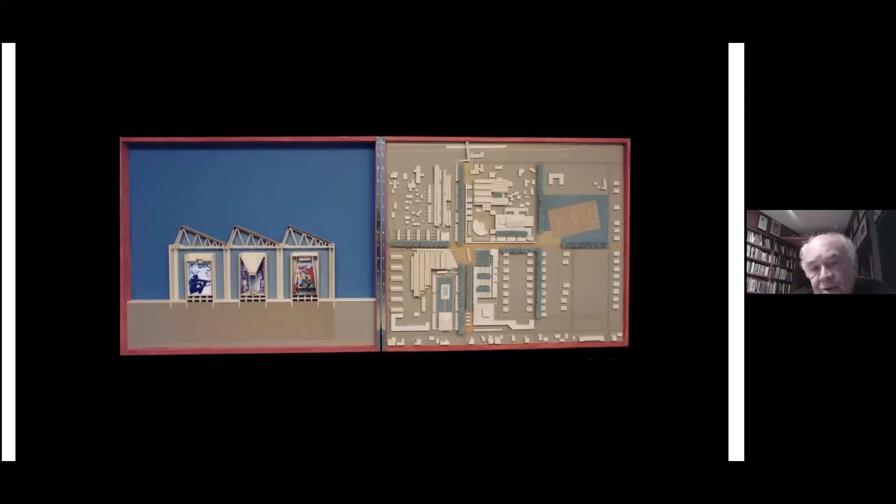So the first project, very quickly. I'm not going to talk about this, it's a competition we won in Port Elizabeth, which is the Detroit of South Africa.

It's where most of the cars made in South Africa are assembled and sold throughout Africa. So it's a heavily unionized and highly industrialized city. We won a competition to design a cultural precinct there, and we were commissioned to design 3-4 buildings.

Of which we completed 3: a museum, an art gallery, and a library. These are some drawings I made for the competition entry, and the sawtooth roof makes its presence felt very strongly in the museum itself. There's a whole story about what goes underneath the roof, which is a series of memory boxes, very tall, 12 meters tall. But for me, what's important is the profile of the roof.

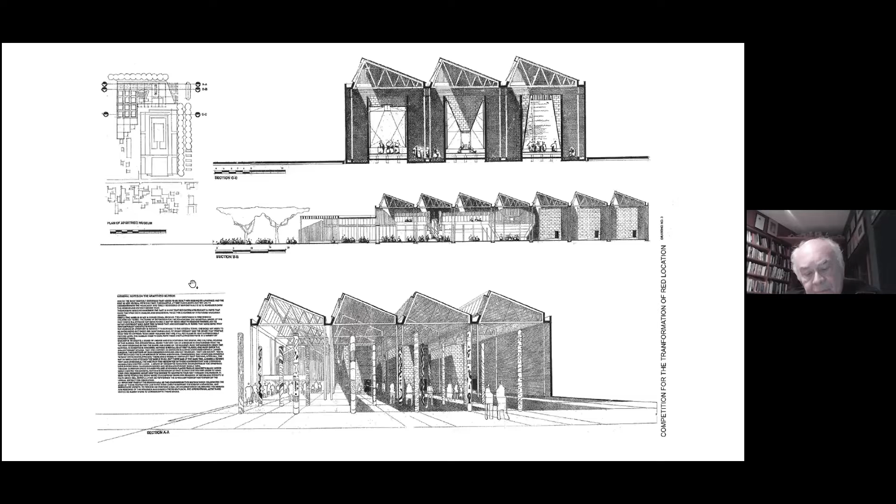The reading of the building became quite important, because we've had some difficulties with the local community, but that doesn't have anything to do with our architecture. It has to do with some of the other political issues that exist in Port Elizabeth, part of the Eastern Cape, which is a disaster area at the present moment. But the building itself, as an architectural work, worked very well. People, I don't know whether it was a familiarity of the form or whatever, but it fitted within what people had expected of a public building.

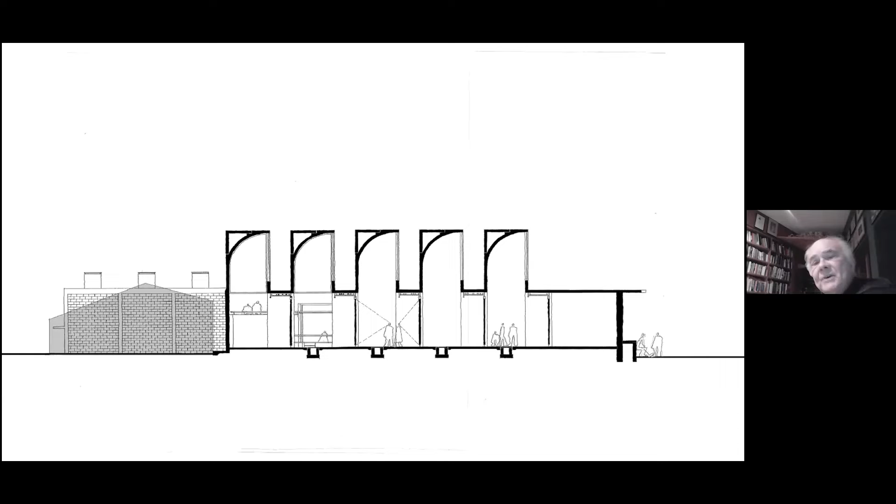So this is the museum building. The second building we did was the art gallery, which again picked up on the idea of a serrated roof, except in this case the roof was adjusted to accommodate the purpose underneath, which really was to do with the display of art. We made these gigantic big towers that were long and linear, bringing lots of south light into the spaces below.

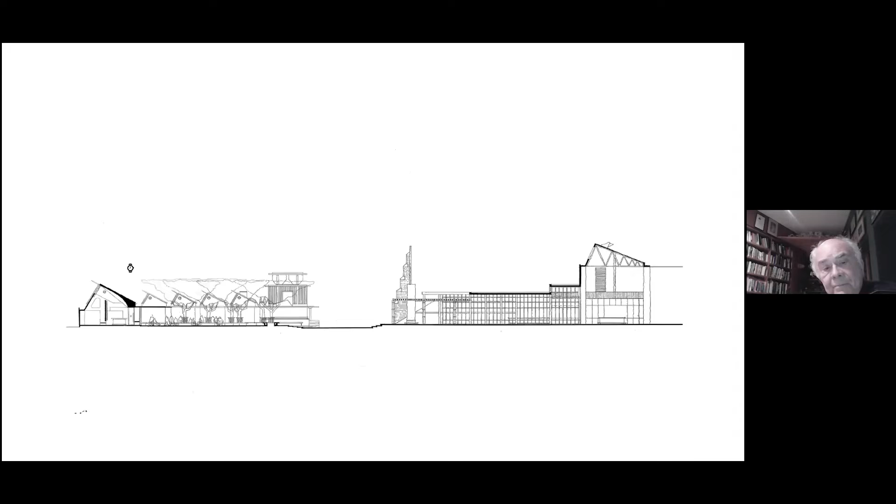And then the final building we made was the library, which again had a roof light, calibrated to suit the purpose of accommodating computerized library access below, the first computerized library for young school kids in townships in South Africa.

So, and then finally the building as it is today. We still have to build some theaters and an art school, which will probably happen once the pandemic has been sorted out and we found a vaccine. But that's another story. So that was the beginning, a kind of strange beginning to try and think about how to make a public building in a new South Africa, where the forms and symbols we associate with public buildings in the past weren't jettisoned, but we needed to think about it in another kind of way.

I was really concerned about going into the everyday and searching within the everyday to try and find where that might be.

I'm going to show you 2 projects now which I think are really interesting for me, because it's the first project I did in my career, a church in Soweto for Desmond Tutu, and then a church I've just completed for an Anglican community in Somerset West.

This is the St. Paul's Anglican Church in Soweto. It was the first building I ever made as an architect in private practice, commissioned by Desmond Tutu and David Nkwe. Desmond was the Bishop of Johannesburg at the time, and David Nkwe was the Archdeacon of Soweto, in Jabavu White City, Soweto.

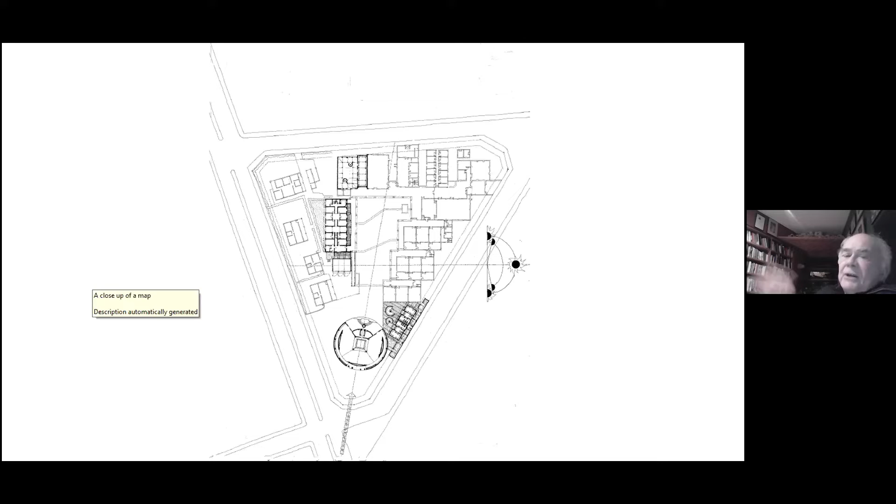It was the place where Hector Pieterson and his family worshipped. They were Anglicans. Hector Pieterson, if you remember, was the young black kid who was the first one killed by the South African apartheid government in the Soweto riots in '76. His body was brought to this site for the memorial service before he was buried in Avalon Cemetery in Soweto. There was an existing community center, and this church was built in the early 80s in commemoration of Hector Pieterson.

It was a circular church where the service is very didactic, and it was interesting because this used to be a place where the diplomatic corps and ambassadors would come to Soweto under the pretext of attending an Anglican church service, but it was in fact a place where they could meet the leadership of Soweto.

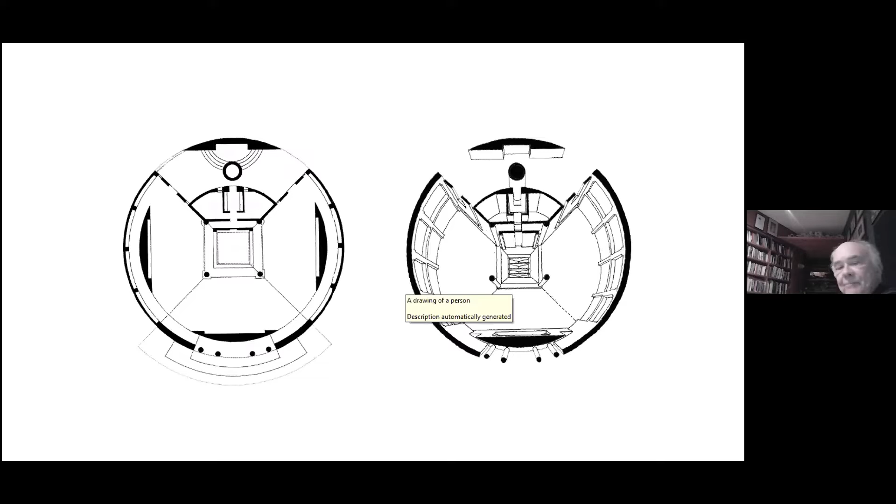The service was very long because it was conducted in 2 black languages and 1 white language, English, for the visitors. So the 3 quadrants in a way became symbolic of these 3 different languages in which the church service was presented.

The back space, the back quadrant, was converted into an outdoor altar, where this is the church and the interior of the church. This is the kind of use to which the church was put during the 80s and early 90s. Nelson Mandela and Walter Sisulu came to this space, and the first big address they gave in Soweto, the first big rally, happened in this large courtyard, with about 8,000-10,000 people there. So it was symbolically important, the interior of the building.

Now, what was interesting about that building was that I was simultaneously teaching at Wits at the time, and there was a very bright young student there who became very interested in the church. I remember taking him out there and talking to him about it. Then about 3 years after he graduated, this young architect came to me and told me he was going to join the church. He decided to give up architecture and become a priest. I said, well, that's great, you've got to be led by the things you believe in.

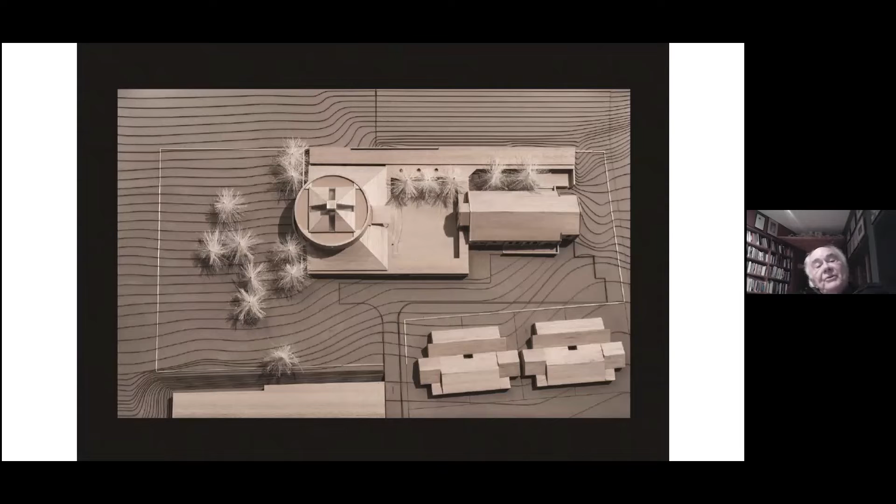About 10 years ago, at least 20 years after I'd last seen him, he contacted me in Cape Town and said he'd just been moved there. He'd taken over a church community in Somerset West, and he wanted him and me to make a church together, which was fantastic. So this is the last building I've done, which remembers St. Paul's Church. It's a circular church, but a bit bigger, the same diameter as St. Paul's, but it had to be usable for 2 different sizes of congregations: one of 450, the usual church-going congregation, and a larger one for special events and occasions that could swell up to 1,000 people.

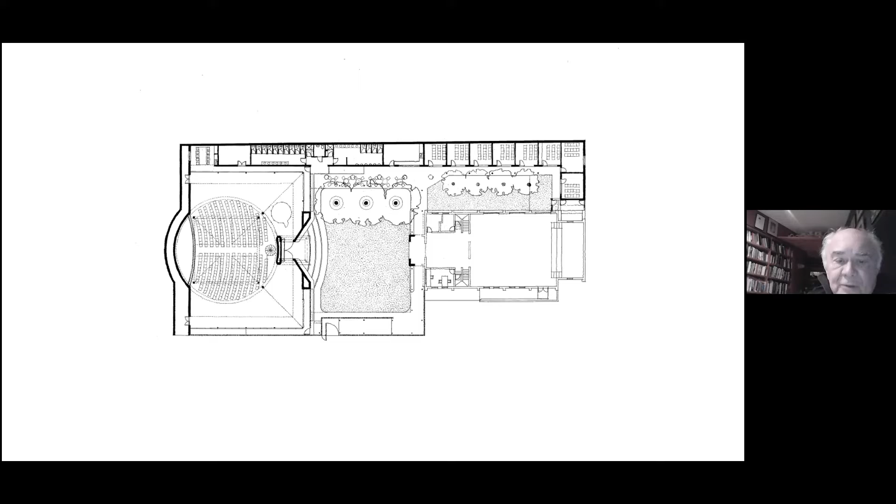So the circular drum grew a skirt that wrapped around it on 3 sides, and that took over the additional numbers of people. It was really very interesting to work through making another church again, but this time with someone who was pretty smart. Even though he was now a priest, a minister in the church, he still carried on with his love of architecture. We had some wonderful discussions about this church, remembering all the time the building we made in Soweto. For the circular drum, we developed a fantastic system of using angled bricks with holes in them for acoustics, and the acoustics inside the space work very well. So it's a very nice building, which I think works very well.

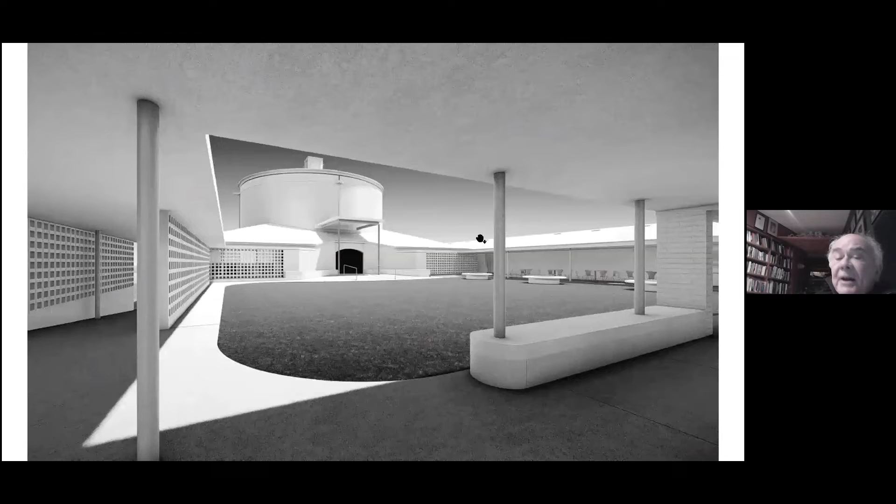And it was added onto an existing church. So the existing church is behind me, looking at this image of the existing building, with a courtyard in between and classrooms on one side. So this is coming back to thinking about architecture in a completely different time. In this case, the building isn't brick, exposed brick - it's a white plastered building.

This church is on the edge of agricultural land outside Cape Town. So this is a reference to the Cape Dutch farm buildings scattered throughout the area, which are plastered, painted white - sometimes even lime washed, although this isn't lime washed. And so it has the same thing. There's a 35-40 year period of time between the two.

And the entrance to the church - again, in South Africa, our cities are not functioning properly. We have streets which work, but our public spaces don't work, and we don't have any thickness to the thresholds in our cities. So this is an attempt to try and create that thickness by bringing the entrance to the church right onto the parking area and then just having a hole in the wall, but layering that hole so that you get views through it to the courtyard behind.

And then these are images of the building, and the curved acoustic wall, which I think works very well. We actually use the church for musical performances now in Somerset West.

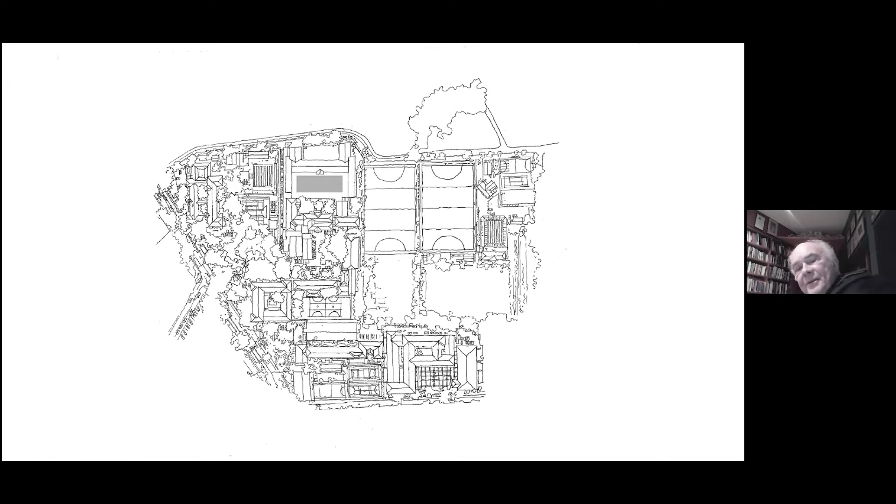It seems to me that in Cape Town, when we make buildings that refer to the landscape, we kind of run away from it. We want to bury the buildings. I'm not sure that's always a good idea, but in this case burying the building was useful. This is a school, Wynberg Girls High, consisting of 4 schools joined together: 2 girls' schools, 2 boys' schools, high schools and primary schools, sharing common sports facilities. There was a real need for more classrooms in the girls' school and no space to build it.

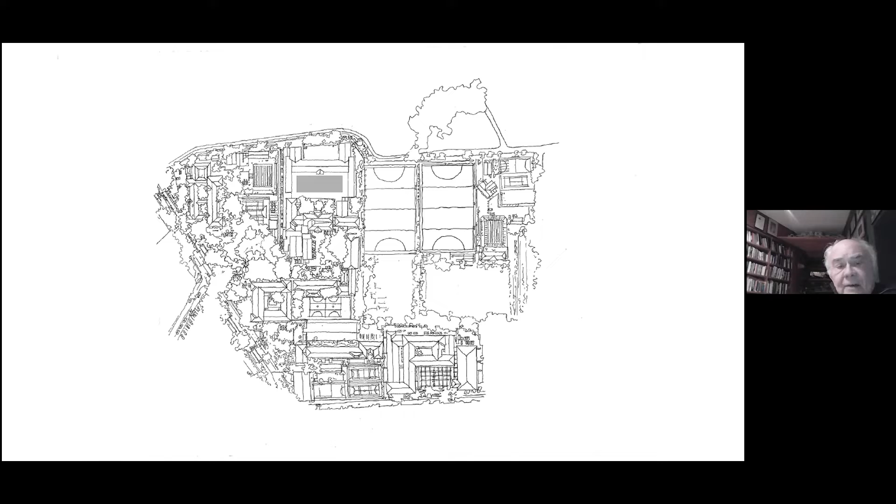The grey area is a courtyard around which we had to build an additional 8 classrooms. This courtyard itself reflects the colonial influence on South African architecture. It was a postmodern thing built about 20 years ago, trying to recreate a typical courtyard you'd find in Cambridge or Oxford, with green space in the middle. The girls weren't allowed to walk across it—they'd walk around the edges. It was a powerfully symbolic space, but also a dead space. The kids didn't use it.

You could see Table Mountain in the background. They needed to add 8 classrooms onto this courtyard, and wanted to build 4 classrooms on top of one wing and 4 on top of the other. They appointed us to do the work, but I refused. I said if you build the classrooms there, you destroy the view of the mountain. I also told them I didn't like the courtyard because it wasn't an active public space, and we went on and on.

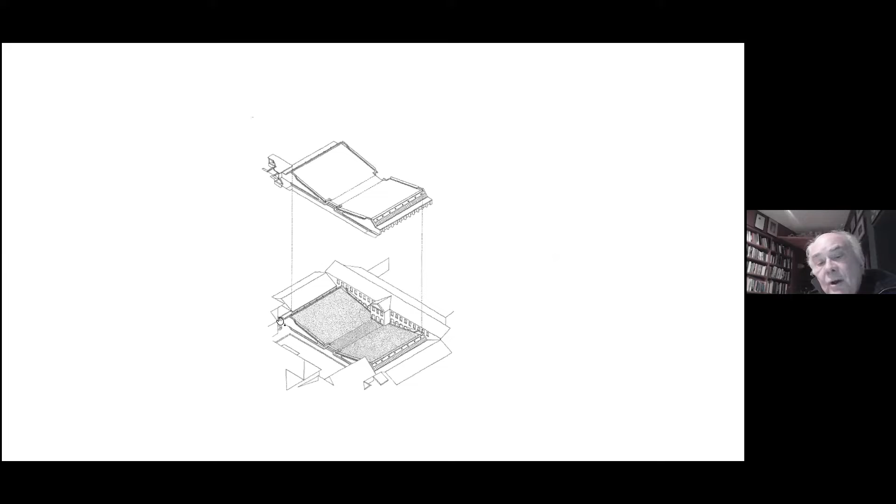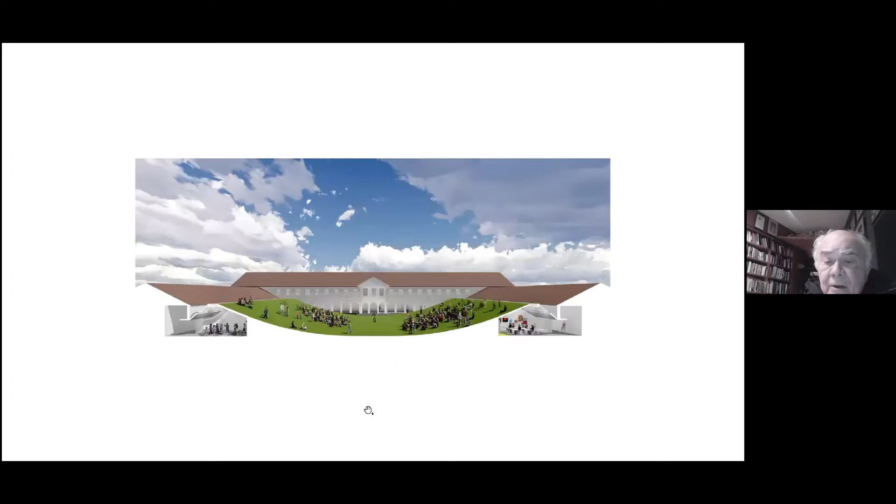So the proposal I made was that we build 4 classrooms on either side of the existing 2 classroom blocks, creating a street between them, then take the courtyard and wrap it on top of the classrooms, creating this kind of elliptical courtyard—not a flat horizontal space, but a curved one—tucking the classrooms on either side.

What was quite nice was the headmistress, who's quite smart, said to me this is a perfect example of deconstructing colonial space in South Africa, which I thought was a rather smart way of seeing it. She saw that the existing courtyard served no real purpose other than as a school courtyard, and saw our new courtyard space as being much more useful.

We built a model of it to show the kids, giving this fantastic connection between them crisscrossing the courtyard every day, with two wings on either side—one looking up towards the mountain, the other towards the sea—and the street we created between the two blocks of classrooms, which were very, very basic. So that was one way of dealing with landscape in Cape Town.

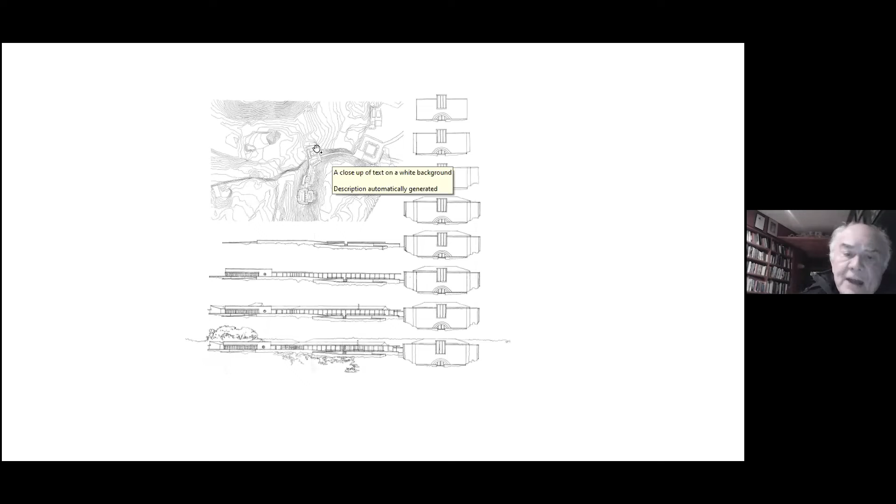It works rather nicely, I think. The other thing that happened was, if I go back, this whole area here was an estuary 5 million years ago and filled up with water.

So what we did was create a covered walkway which connected all these different elements together, but we made a thick wall, like a breakwater wall over here, which separated the activities of the center from the actual fossil field itself. In a sense, that wall mimics the kind of breakwater wall you would find along Sea Point or any of the resort coastal cities we have, imagining this was filled up with water.

So there were a number of devices we developed, layering etc., to give it that sense. The actual museum itself, I think, works very well in the sense that you enter at the top level and you move around it, around a double volume space.

You drop down into the double volume space. You then move around that, and then you drop down into the basement where the children's display areas are. Then you move out of that onto the fossil field.

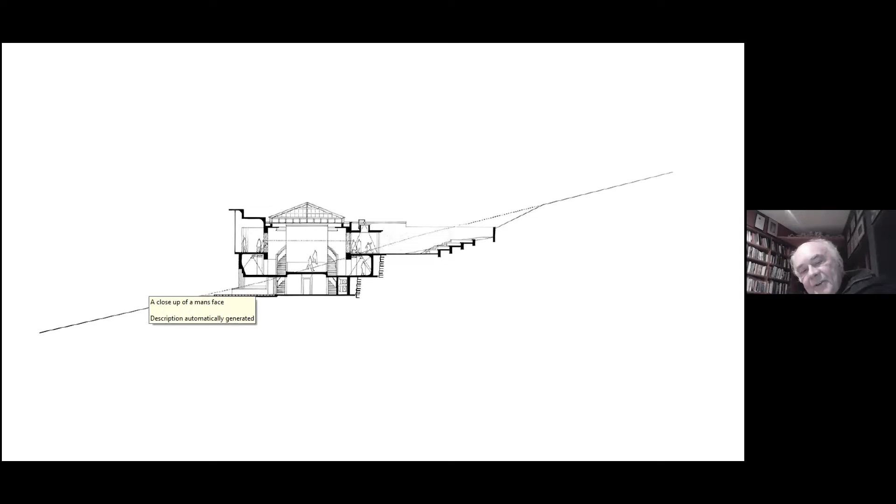So it's one of those very nice museums where you never retrace your steps. You're working under the pressure of gravity, dropping down all the time, and you exit in a very different place from where you entered.

We built a series of models, and this is the continuation of that line of stratigraphy I was talking to you about, with this thick wall on the landward side that wraps around and contains the different buildings: the entrance, the education center, the entrance courtyard, and then that thick wall I was talking to you about.

A view into the museum from the top level, so you're looking down into the double volume space below, and then the double volume space itself.

This is a photograph we took of the opening. It looks like a render, but it actually isn't. We used a very clever system developed in South Africa for art galleries, south lighting, which reduces UV to almost zero. So you don't get any shadows cast in the internal space, and you get a fantastic saving in terms of heat gain.

We had a local artist who constructed these life-size models of sivatheres out of abandoned, discarded pieces of wood. And he didn't cut one piece of wood to fit. They're really quite beautiful pieces.

And then the building as it is in its setting, this is the center that is tucked into the side of the mine, the fossil, the place where you go and visit the fossils, and then this thick wall I was talking to you about, and the building at night time.

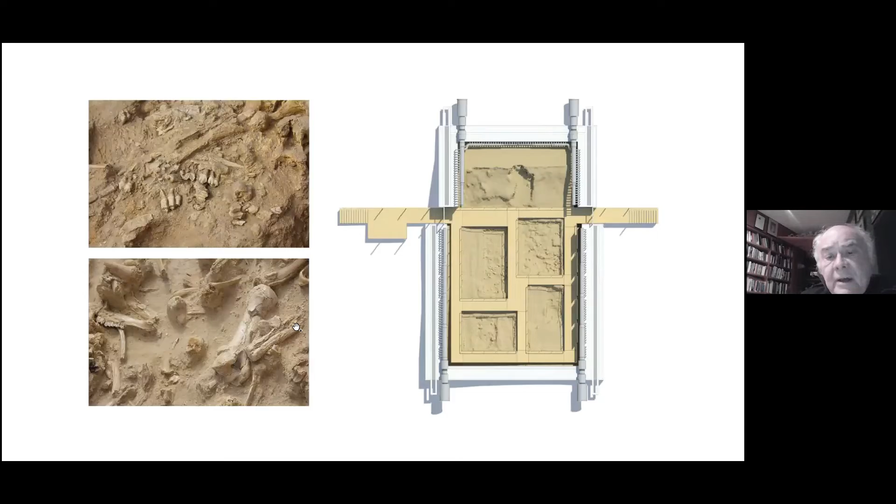And this is a cover we've designed for the dig site, which we'll build one of these days when we can raise the money. We've used a system of rock stores to cool the air and cool the space naturally.

We've been involved in some housing projects, which I thought I would talk to you about, which I think are interesting in as much as they were sponsored by groups outside of South Africa. The first one was sponsored by the MAXXI Museum in Rome, as part of an exhibition that Pippo Ciorra held a number of years ago called The World Without Petrol. It was an attempt to get different architects around the world to imagine what it would be like to live in a world where we didn't have petrol any longer. That gave us an opportunity to look at home-based industries, where people didn't move great distances from where they lived to go to work.

What has happened in South Africa in terms of housing is our government has done some remarkable things in terms of numbers: 3.5 million houses have been built, another 1.5 million sites have been serviced. But what they've done is simply what the apartheid government did, which is build 4-room boxes in the middle of nowhere, all in the wrong place. And this is a huge problem.

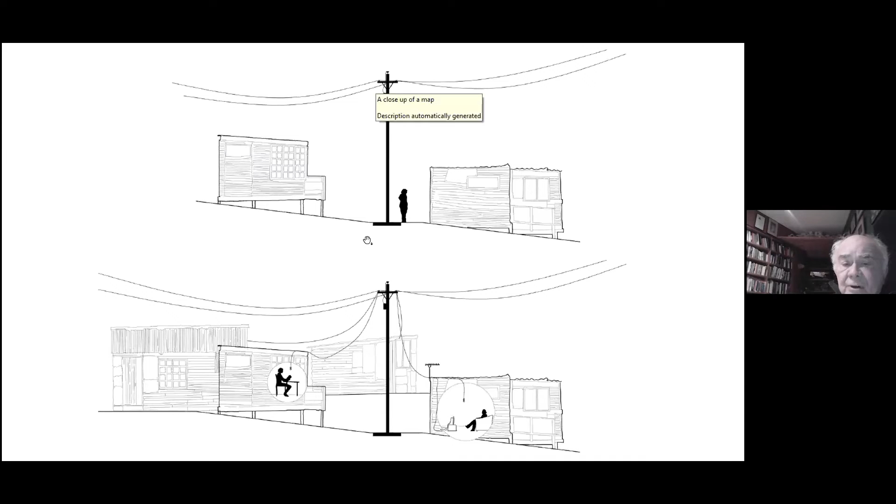So what we did for the MAXXI exhibition was say that we wanted to leave the community as it was. We didn't believe there was any point in trying to rebuild it, but that what we would try to do is bring in services. We also understood that when you bring services to areas like this, you lose 40% of the houses, because you have to dig out gigantic trenches in the ground for sewage and water, etc.

So we started off looking at electricity and the upgrading of shack settlements in South Africa with electricity. We came to the conclusion, which is quite obvious, that this is the easiest service to provide, because everything is overhead, and the only point of contact to the ground is where the pole hits the ground, finding its support. This creates a minimum amount of disturbance.

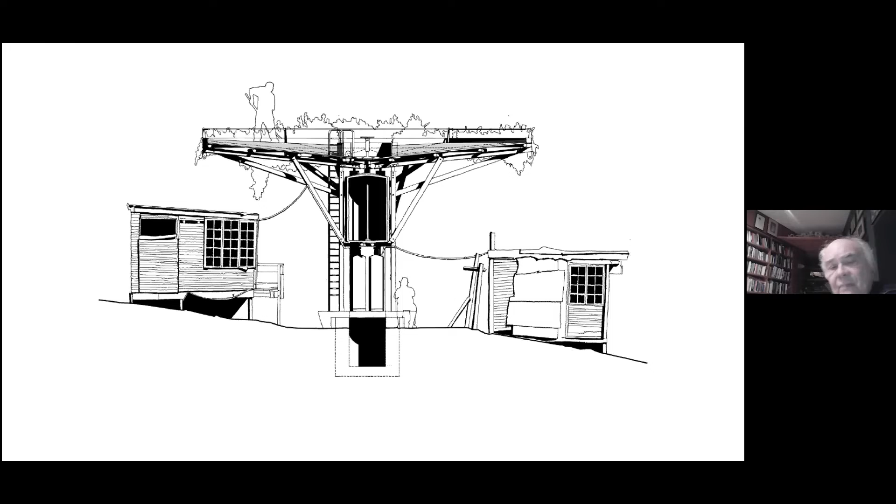So we said, well, if that's the case, can we not look at another way of bringing services to these areas where you don't disrupt the ground plane, but bring it overhead? What we did is develop this idea of what we called an artificial tree machine, where we planted these artificial trees amongst the shacks. We wanted to use the top level to plant vegetables, urban agriculture, and collect water. At the base, we developed a system of methane generation and water filtration, so these would become community collection points, keeping all the houses as they currently were in that area.

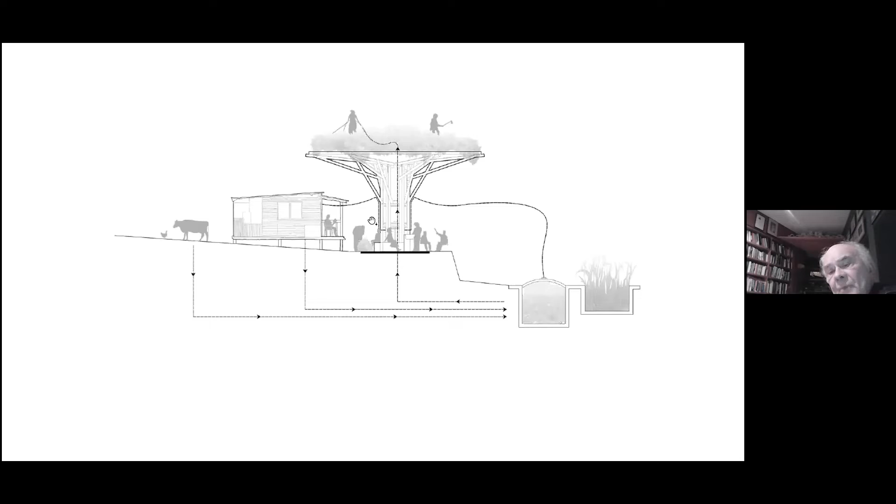This shows the kind of system of energy generation and water retention that we developed, and gives an idea of how the area would look with these artificial trees, which I think probably do more work than a natural tree would. I've had arguments with landscape architects who said trees are important in terms of carbon dioxide and so on. But these do the same thing because they have green canopies, except they're green canopies that you can eat, and they do lots of other things.

So that was an idea. We tried to get someone interested in the city in developing this as a prototype, and they weren't interested.

This is a drawing we made for the exhibition, where at the top you can see Hangberg as it is, and below you can see a tree planting exercise we made, where we put artificial trees down in between all the shacks rather than build new houses. So that was one housing project.

The second one is one we did a few years ago for the Herrhausen Foundation in Berlin, as part of an urban exchange program, where we worked with a very fine Berlin architect, Rainer Hehl, who's a professor at the Technical University in Berlin.

What we did is we looked at what is the minimum intervention that you need to make in an area of great poverty in terms of housing, where you look at what is the least bit of design that you can do.

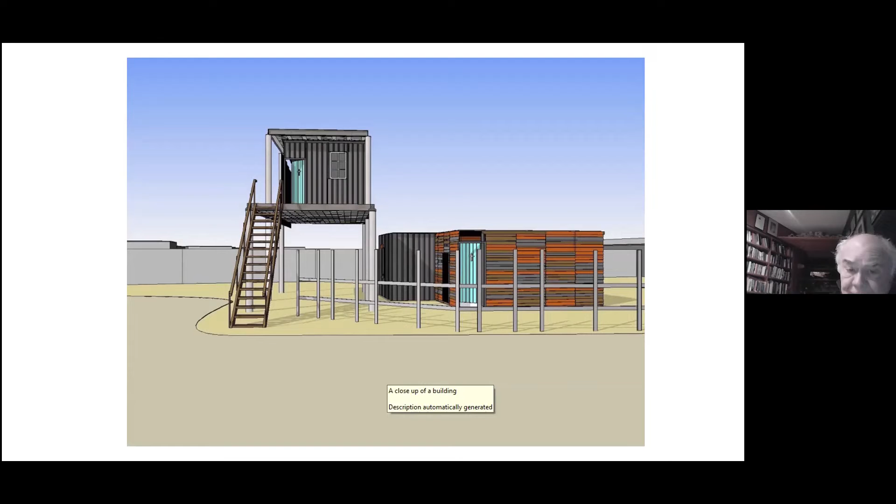We developed the structure so you could go up 3 floors, and the cost of one of these table houses was the equivalent of about £300 sterling. So it's relatively inexpensive, and the ability to do it is well within the capability of people living in these communities. Everything can be bought from a local hardware store, precast planks, etc.

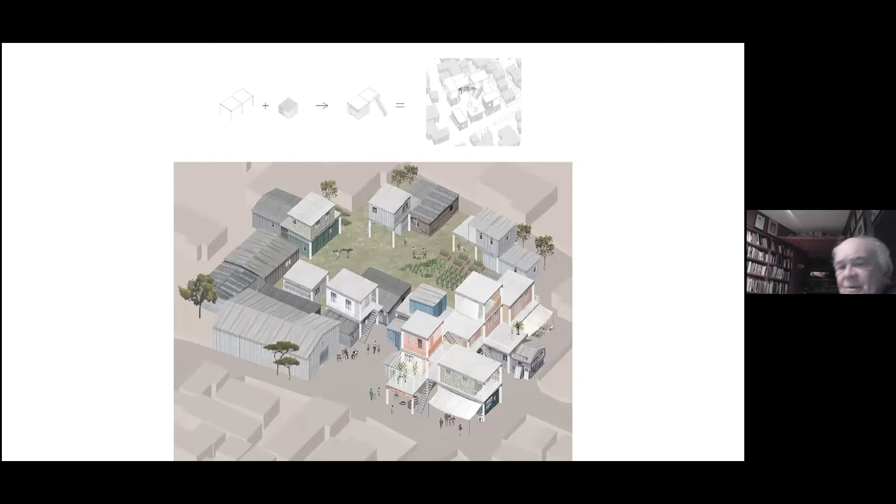We then looked at two kinds of ways this might be done. One way where we would consolidate an existing community of houses and extend vertically, releasing green space for urban agriculture or other uses. The other idea was making social housing, where the housing spaces were linked off a social street, a public street in the sky.

This is the kind of technology we used. These are the connectors between the columns and the steel beams that supported the precast planks. You can see they're very simple, and these were built in that local community. People just built it, you've got welders and people who can do this kind of work. It's quite easily within the capability of local people to do.

And this is the house. The people who built it say it can be built in 7 days, of which 2 days are spent in construction, and the other 5 days are waiting for the concrete to set. So it can be done in 7 days, for the equivalent of 300 quid, which is not bad. There's the proud homeowner standing there, and then the shack on top.

Then we took our eye off everyday practices and learned a good lesson, because the first thing this woman did was rent out the space underneath the shack to someone to park their car. So parking a car seemed to be more important than actually building that out of permanent material. It was a good lesson for us.

We're now in the process—we've taken a piece of ground in Philippi and we're building an ideal homes exhibition, which we're trying to raise money for, and hopefully in the next couple of years we'll develop this idea as a real, nice three-dimensional set of spaces. You can see here we've got two of the modules joined together, and then taking one vertically.

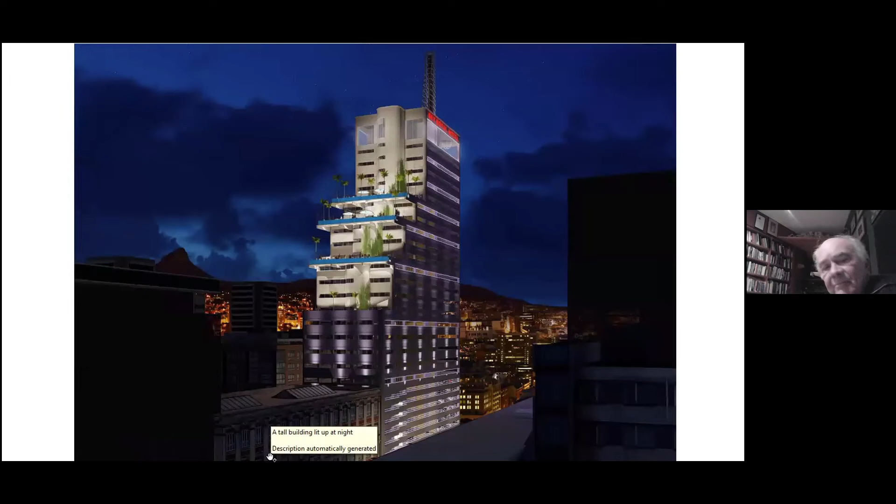They can't fill the building, and it's now being converted into a hotel by us. We're adding cantilevered swimming pools, bars and other things at the top, with beautiful views of Cape Town. But for me, what was very important was the challenge—we've never faced this before—of taking an office building and putting in services for 650 to 700 bedrooms.

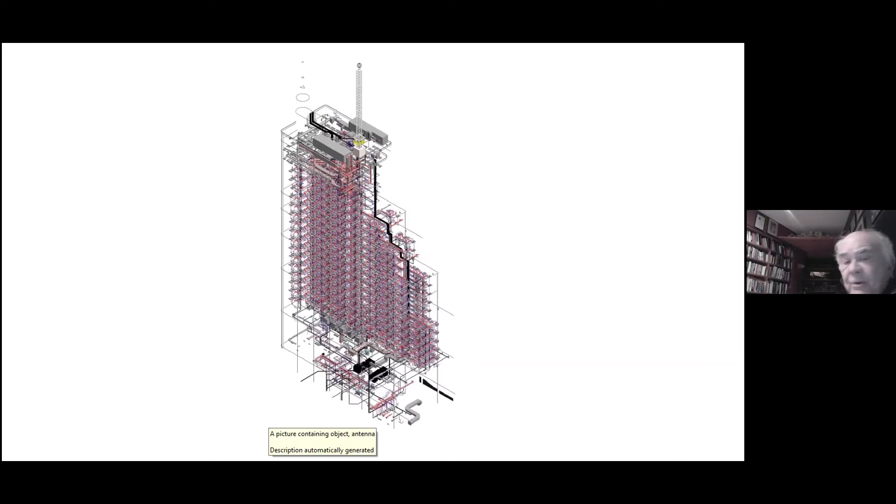This is what happens—it's just a servicing nightmare. We were very lucky with the pandemic, because it came just as we were starting to coordinate all our services, and no building work could happen on site for two months, which gave us time to really resolve everything. Now the services work quite sweetly. But you can imagine fitting hot and cold water, air cooling, fire systems and everything else into a building like this—it's really quite a challenge.

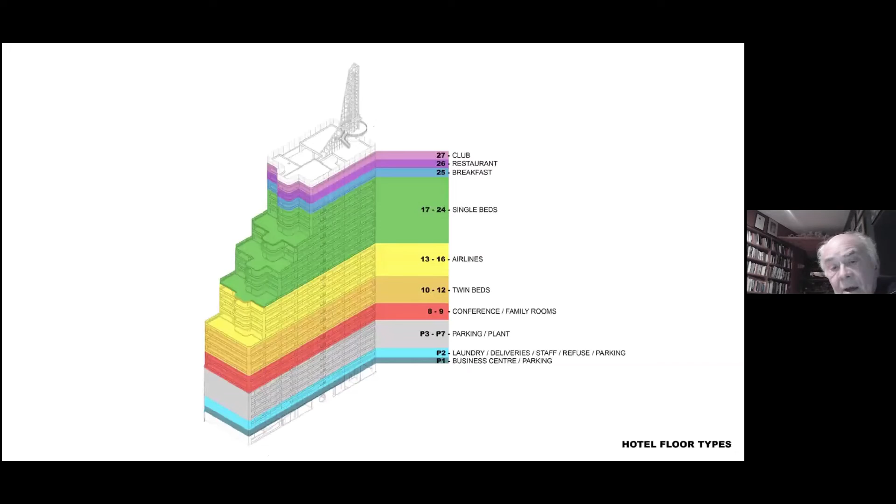This is the building—650 rooms—and this is how we managed to fit them in. With a 7.5 meter grid, the clear space between walls in the rooms is only 2.2 meters, which is very narrow. We managed to get a tight little bathroom by taking the wash basin and vanity outside of the bathroom, which let us compress it even further.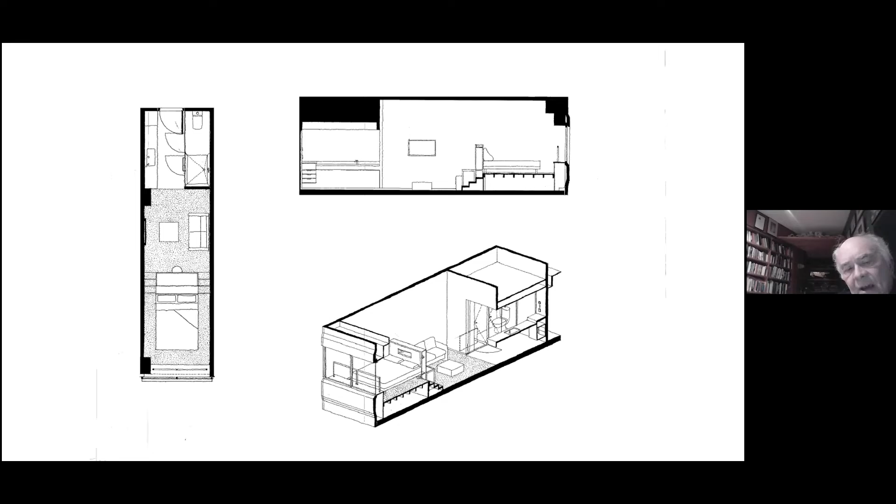So it's for nothing, really. What we're trying to do, which I think will affect the future of Cape Town, is attract African people from the rest of the continent to come on holiday—something they haven't been able to do because Cape Town has pitched itself to the European and North American market, pricing hotel accommodation out of reach for Africans. This set of hotels we're developing will bring it within reach, and hopefully help consolidate Cape Town as a place for other Africans to visit.

When I spoke about our principle of adaptation and being able to adjust to different uses, this is a lesson I learned early in my career. It's difficult because as an architect you bring a building into being to satisfy a purpose—someone says they want a house and you design a house. But how do you design those spaces so they can become a clinic or something else over time? That's really the challenge we've set for ourselves.

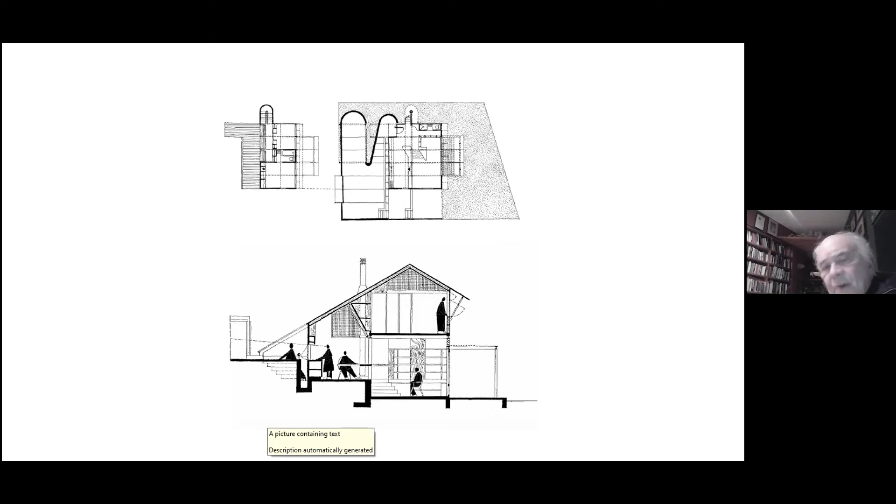This was a little 90 square meter house I did for a friend of mine, Dr. Teresa Nkumalo, from Alexandra Township many years ago, in the mid to late 80s in Johannesburg.

And just as we completed the house, she fell in love with a politician from Zimbabwe and decided to get married and moved up to Harare to live with him, leaving this empty house and not knowing what to do with it. So she left it to her nephew, who was studying at Wits at the time.

What he did was convert it into a fantastic shopping center, if you want to call it that. The image on the left is the kitchen as it was, with the bedrooms above and the living room below. He's made this into a grocery store, made the living room below, and got two pool tables there so people can come and play pool. Then he converted the bedrooms above into bunk rooms that could sleep nine people. He made enough money running this business to put himself through university at Wits.

I'm really excited about that possibility that architecture can have, particularly in my part of the world, where we can't afford to pull buildings down. Buildings must be used and reused for different purposes all the time. And yet we seem as architects so determined to keep the buildings we designed locked into one specific kind of use and unable to do anything else.

This building — I was very proud that my practice won the inaugural Lubetkin Prize for a museum we did in South Africa. Lubetkin has always been an architect whose work I've admired very much, and I love this building he did, the Finsbury Health Centre in London. I'll go very quickly through it, but he saw it as a way of bringing hope to people from the slums of London.

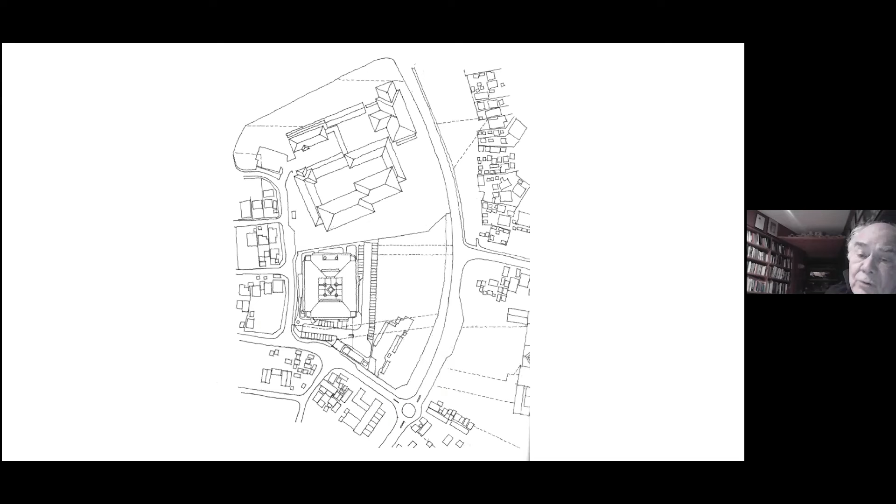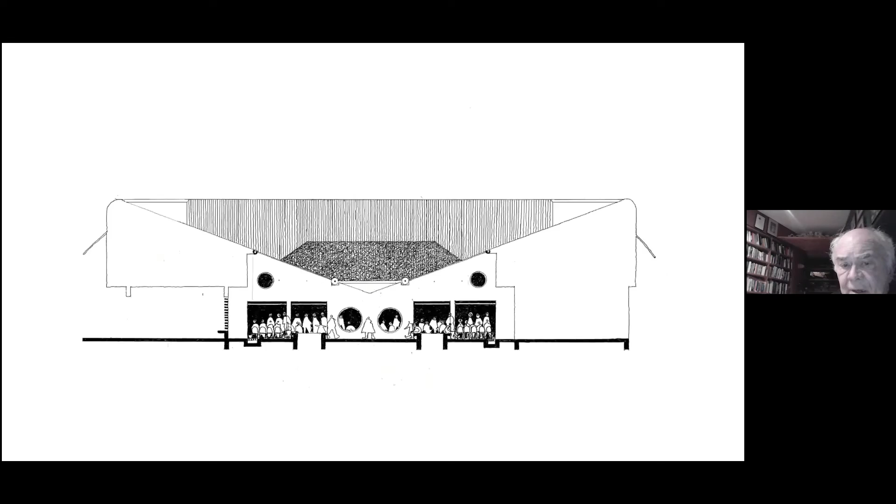It's a very, very simple building, but what we've really struggled with is trying to find a language for the building that gives it signification as a public building. I think we're getting there, and the city is very excited. The Department of Health is very excited about what we're doing, because I think we're finally getting to grips with making a clinic in a part of the city where people live in appalling circumstances.

So it's clean, it's white, it's shiny, it feels hygienic. You come to it and you feel like you're in a clinic.

I'm going to end off, very quickly — I'm sorry I'm running out of time — with a project we're doing for my wife's uncle, Dennis Goldberg, who was one of the Rivonia trialists jailed with Nelson Mandela. He died recently. He's an extraordinary man — he spent 22 years in jail — all for this thing called a House of Hope in Hout Bay, which will be a place for young kids to come to, where they can learn through the experience of Dennis's life what sacrifice means for the common good, and also pick up other skills.

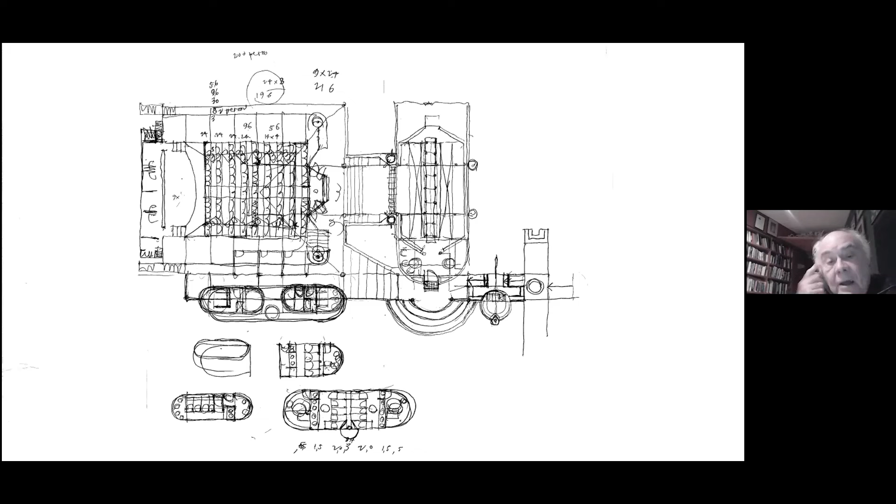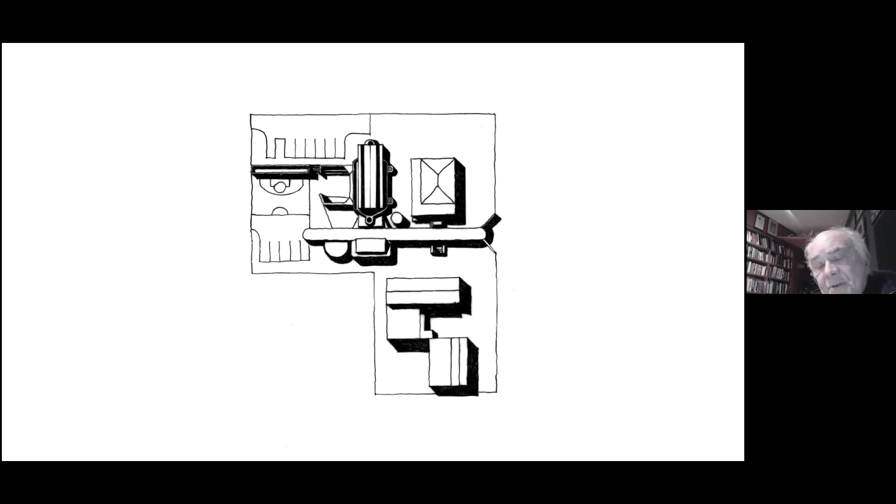It's been an interesting project in the sense that Dennis died a while ago, and I, as a family member and also a trustee of the Dennis Goldberg Trust, have been left with the task of designing this building. So in a way I'm designing it with some other architects — there's a friend of mine, Ian Lowe, who's working on the exhibition, and other people from my office — but we're effectively designing this building ourselves, bringing it together in memory of Dennis.

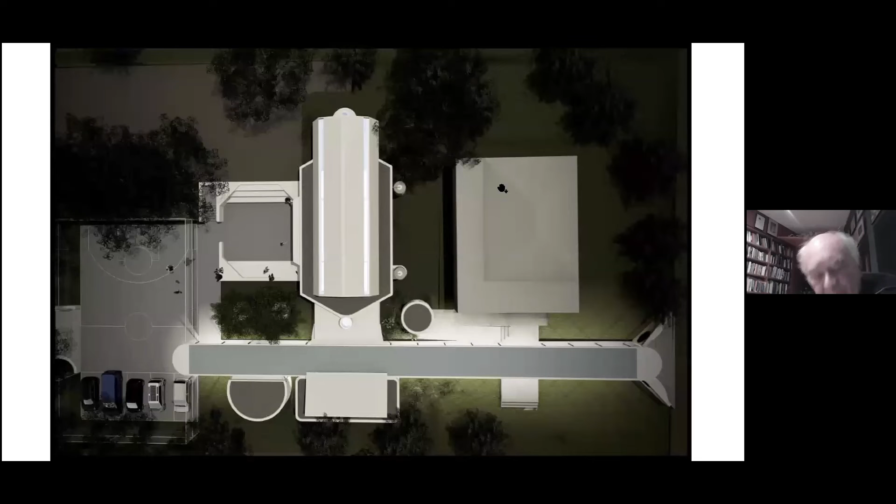These are some drawings we've made, showing the museum and some old buildings, and we're trying to wind its way through those buildings. I'll go very quickly through this — this is the main exhibition space in the building, where Dennis's story will be told. In the green space there is a classroom where kids will be taught art, so it's both a gallery and a classroom all in one space, which is rather interesting.

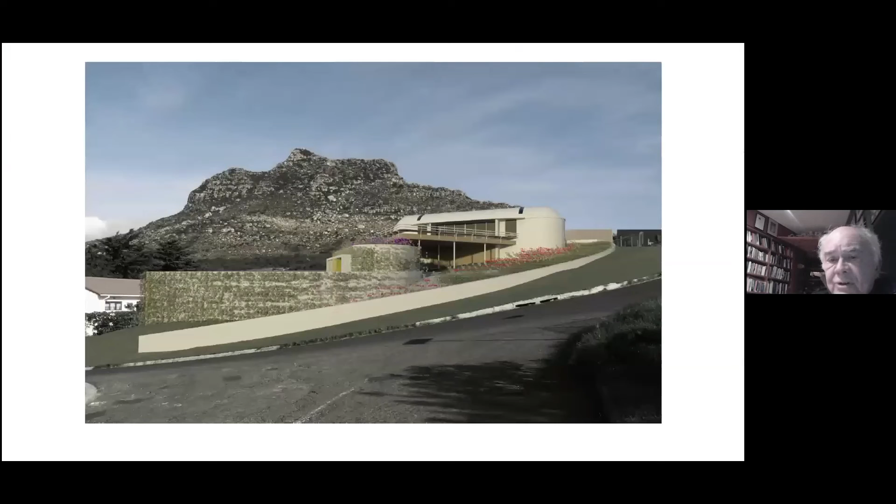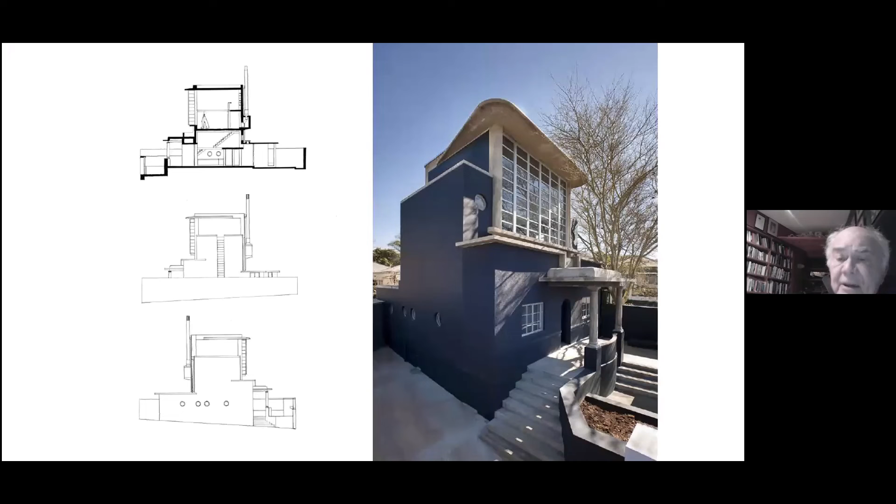I'll end off very quickly by showing you some houses we do, which I think are very small — probably not more than 100 to 150 square meters in area — but they act as experimental pieces of the work that we do. They're usually for friends, and they're usually very interesting buildings. We tend to attract interesting people to come to us, and we learn a lot of lessons.

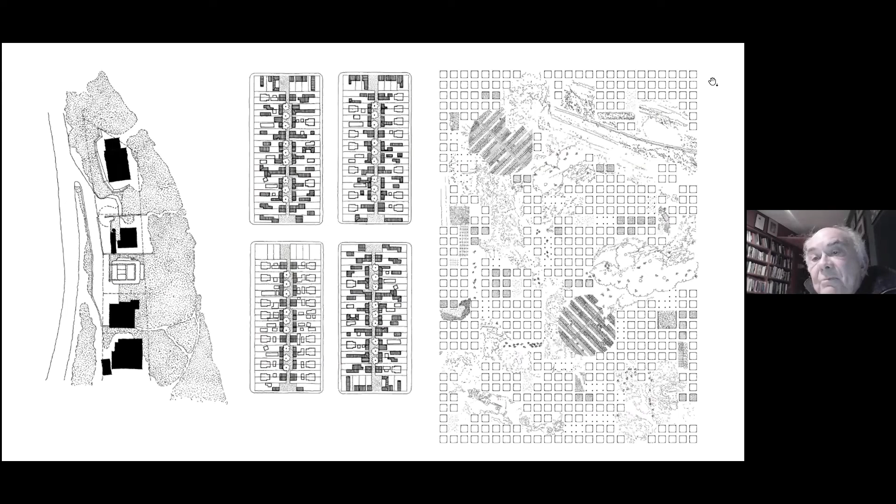This is essentially the conundrum that we face in South Africa. I'm sure you face it in the UK, they've certainly faced it in America under Trump and others, but this huge degree of inequality - I'm not sure what we can do about it as architects other than to be aware of it. This little house, which I've just shown you, could buy the equivalent of 1,000 of my measure of housing. In the same city, someone can live in a house like that, and the value of that house can be the equivalent of 1,000 houses, which if you took 4 persons per house would be 4,000 people. So there's something wrong with the world in terms of how wealth is distributed and the inequalities that exist. That for me is the real challenge we face in South Africa.

I don't know, as architects, we've got to work towards it. We all have our own ways, I think, by acting ethically, and I can talk about that, but I think I'm going to end my talk there. I think I've talked enough, and I'm just getting towards the end of my time.

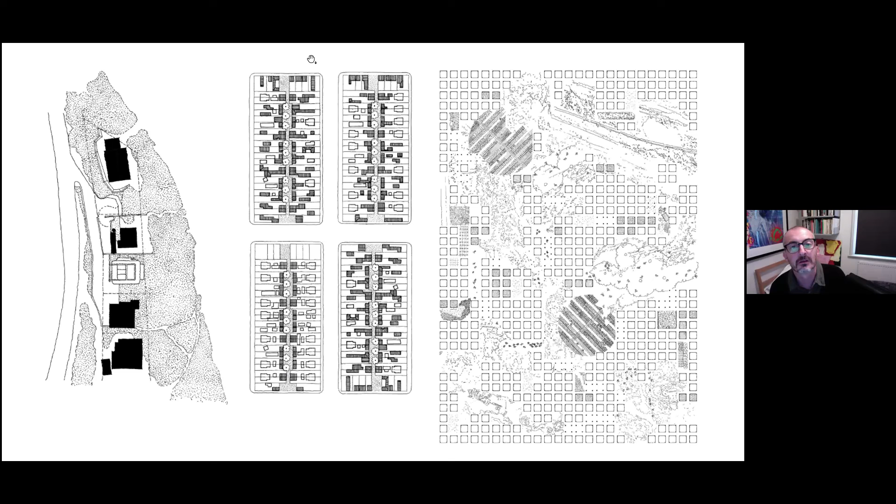Hi Sally, hi Joe. Question from another of your students of 30 years ago at WITS. Oh my God, see you. Hello.

Just a question: if you were advising the South African government about changing people's perceptions of what form of housing is a human right, what do you think the main thing you would be saying to them would be?

Well, I think the first thing is that the government is wrong in trying to centralize housing, because when you centralize housing through a national housing ministry, you land up building one single house type that you apply throughout the country. So it needs to be decentralized, with local control - cities need to take charge of it. Then we need to find other ways of describing the houses that are made, because the range of housing needs is infinite. Every family's housing needs are unique - some people want to rent, some people want to buy, some people want a house - and we need to find measures that can build that kind of infinite variety into the system of housing production.